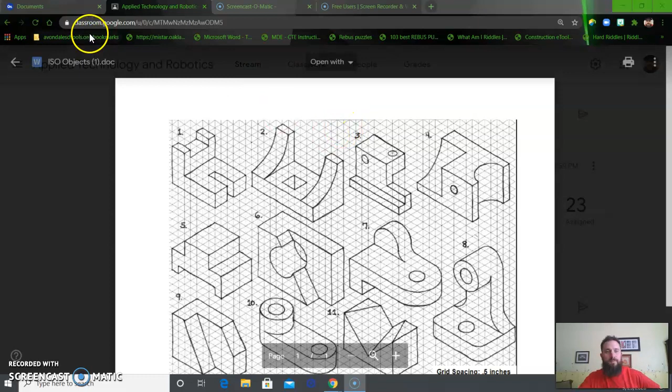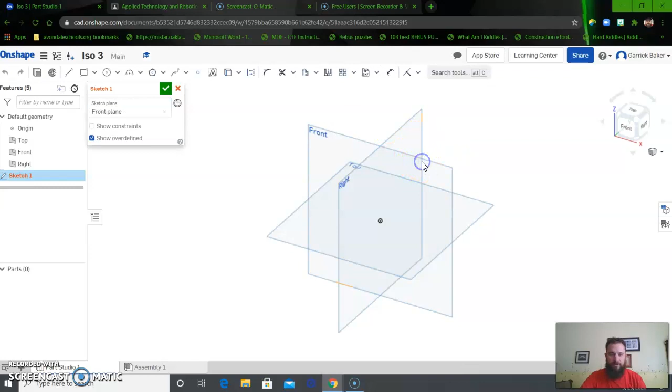All right, so I want to get my measurements down. I'm going to start my line right here. So it's a ½ inch down, 1 inch over, and then I'm going to go up farther to here, which will make that 1.5 inches and over another inch. So I'm going to create a new document, call it ISO 3. All right, and I'm going to create a sketch, and I'm just going to do my front face again this time. And I'm going to use the line tool.

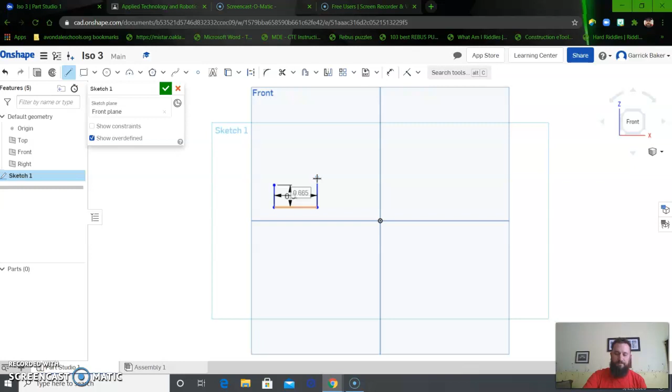So, like I said, I'm going to start right here, create a line, go down ½ inch. All right, go over 1 inch. Go up. What did I say? 1.5, I believe. Just double check. So I'm gonna go 1.5, and then over an inch. So up 1.5, over 1,

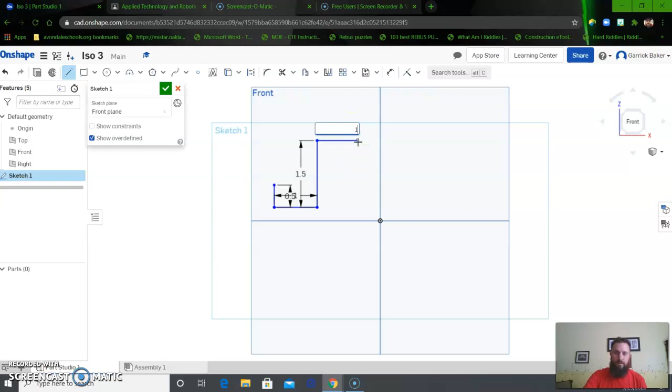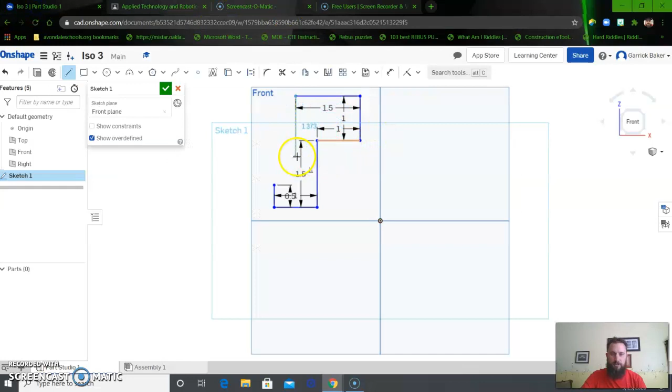and then I'm going to go up again to do this spot right here, which is 1. I'll type in 1, go over, which will be this line right here, which is 1, 2, 3, which would be 1.5. Enter. I'm going to go down a total of 1, 2, 3, 4, 2 inches. Click here, go down 2, and this should connect right together if we did it all correctly, which it does. Beautiful. So this is the face that I'm going to create, and I'm going to extrude it out.

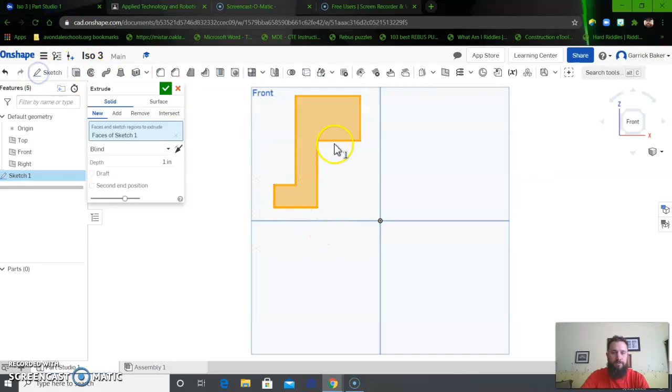So I'm going to go for this full depth right here. So we got a total of 1 inch, 2 inch, 4 inches. So I'm going to go to extrude. I'm going to go at an angle here again. I'm going to go 4 inches, enter, and click check. So this is what we got right here. So it's not the exact same object, because what we're going to do now is we're going to cut this away right here. And there's a couple of different ways of doing that.

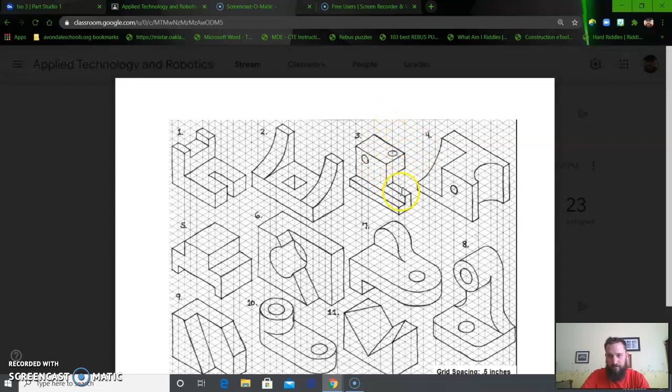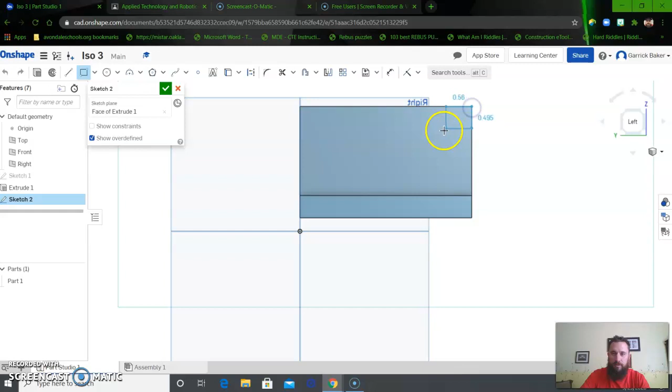What I'm going to do is I'm going to create a sketch right on this face here, and I'm basically going to make a square. So the square is 1.5 inches tall by 1.5 inches wide. So I'm going to create a sketch on this face. Here, sketch, there we go. I'm going to look at it from the left view here. Like I said, I'm going to create a rectangle, corner rectangle. I'm going to start from this corner, the top right corner. Let me click my tool, there we go. I'm going to create this rectangle. Again, this is going to be 1.5 by 1.5. All right. So if we look at it, it looks like this guy here.

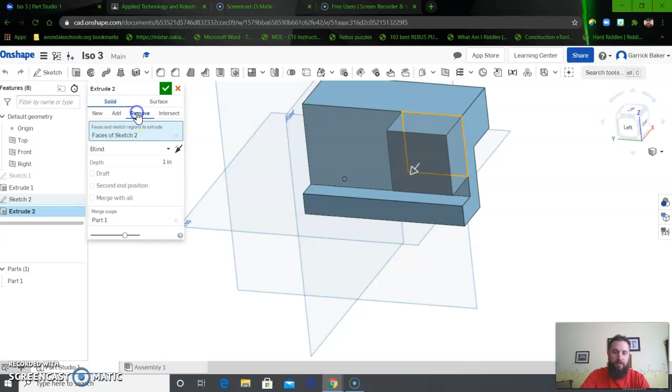And what we're going to do with that is we're going to extrude. I'm going to select that, which it does. And then what I'm going to do is I'm going to click remove. And the depth of it, I want to change the end type, which is blind. I want to change it to through all. And click done. So now we got our object looking pretty close to what it should, which is this right here. Only thing we're missing are the holes.

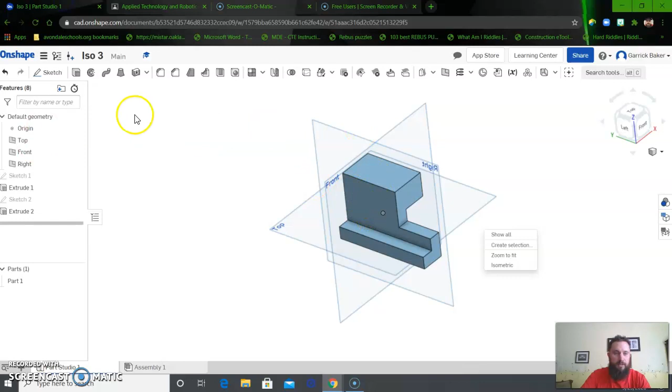So I'm going to take my measurement of my hole. So this guy is a ¾ inch over with a ½ inch diameter and a ½ inch down from the top. So I'm going to create another sketch. Click on sketch, click on this face here, change it to my left. Now I'm going to use a circle tool here. So my circle tool, I'm going to do a center point circle. All right, I'm going to click it just somewhere over here and change that diameter to 0.5.

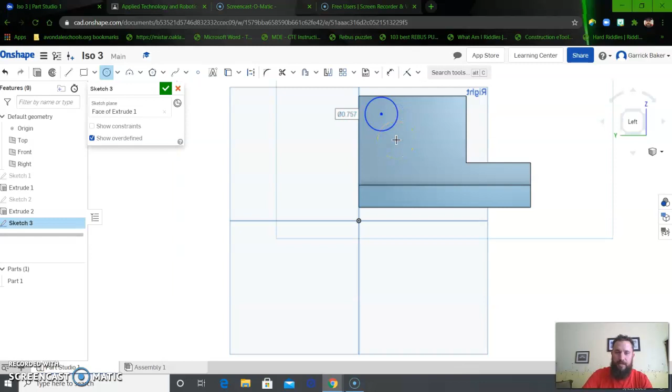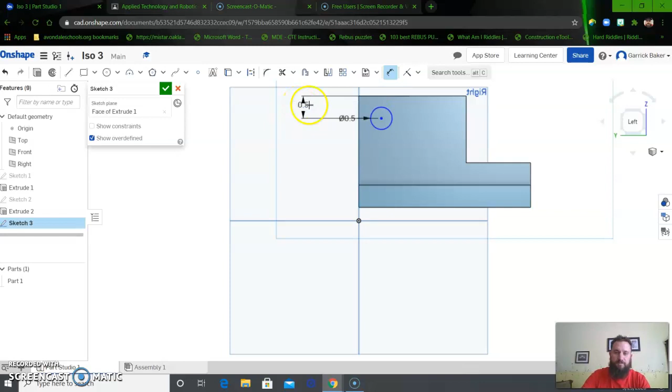And I'm going to measure that distance. Again, the center point is a ½ inch from the top here, and it is about 0.75 inches from the left. So I'm going to go here, go on dimension, click on this top line, click on the center point. That brings it over here. I'm going to click and then change that to 0.5. Then I'm going to dimension from this line to the center point and click. And again, that is 0.75. Enter. All right. And click escape to get out of my sketching tool.

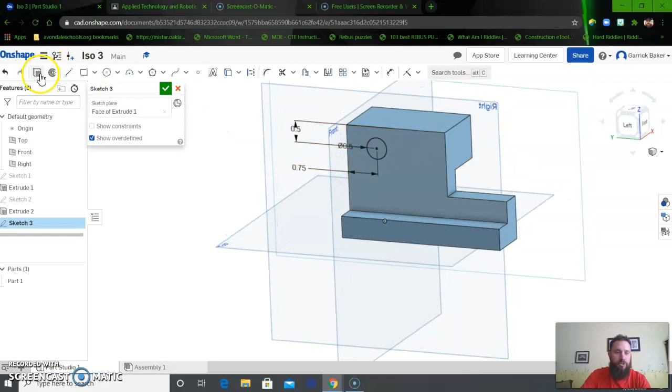So now we got that circle there, and we're going to hit extrude. Click again, I'm going to click remove and change from blind to through all. Click the check. Now if you notice, I got a hole going all the way through. Okay, so we're going to do the same thing for the top of it here. All right, so let's check where this hole is going to be. It's the same size, it's a ½ inch hole. Again, it's a ½ inch over and a ½ inch over from both that corner there.

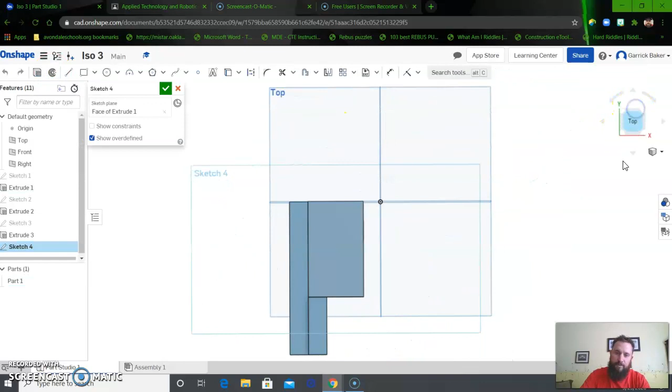So I'm going to create a sketch on that face. Look at my top view. Do another hole. Click, click, type in 0.5. Go to dimension. Click on the center point and this line. Bring it down. Change it to 0.5. Click on the center point and this line. I'll bring it over here. Type in 0.5, and then I'm going to extrude that

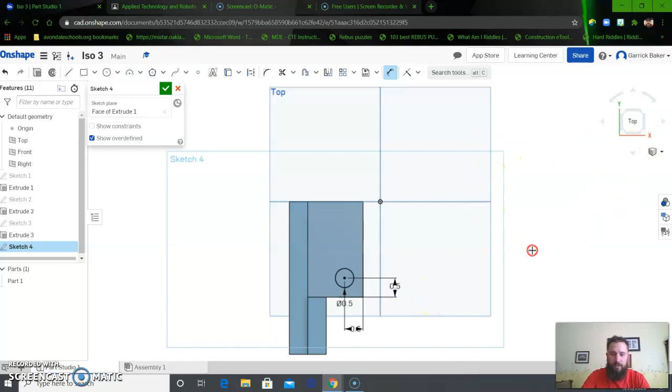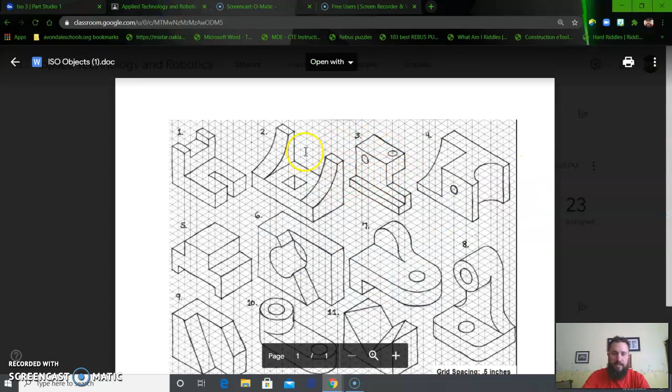hole. Again, I'm going to do a remove and through all and check. So now if you look at it, the hole is going all the way through. Look at it from our diagonal here, and it looks the exact same as that guy there. All right, so that is ISO object number 3.